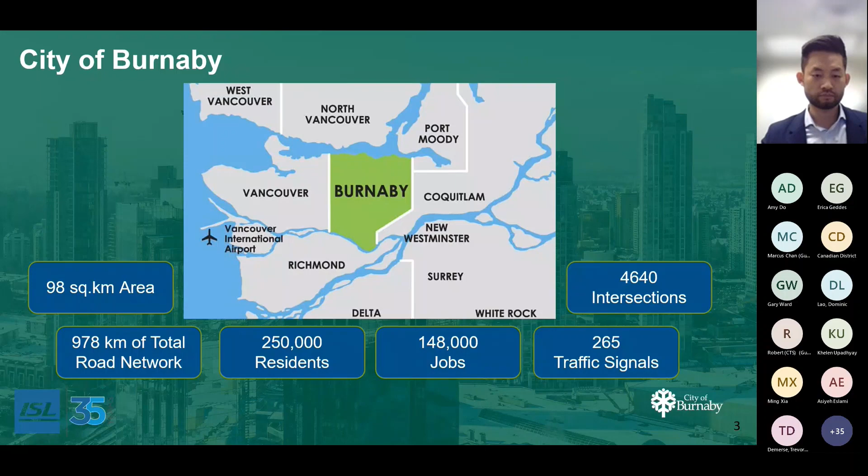So why did we venture into doing this study itself? The road safety network screening was really a result of the Connecting Burnaby Transportation Plan. It was adopted by council in December of 2021, and this document guides transportation planning policy and decision making for the next 30 years. In this plan, there are 6 main goals.

The first one here is to provide all people access to the transportation system, to enable safe and secure movement of all people, goods, and services across all different transportation modes, to support the health and well-being of the community by encouraging, enabling, and empowering people to choose sustainable or active modes of transportation. Also to help direct transportation planning and infrastructure towards green, sustainable modes, and to support Burnaby's economic, environmental, and social prosperity, along with the development of a connected community for both physical and social connections.

So we also have 3 main targets here. The first one here is Vision Zero.

This goal is to achieve 100% reduction in deaths or serious injuries on Burnaby's transportation network. So in the following sequences, by 2030 we would like to achieve a 20% reduction. By 2040, 75% reduction. By 2050, 100% reduction.

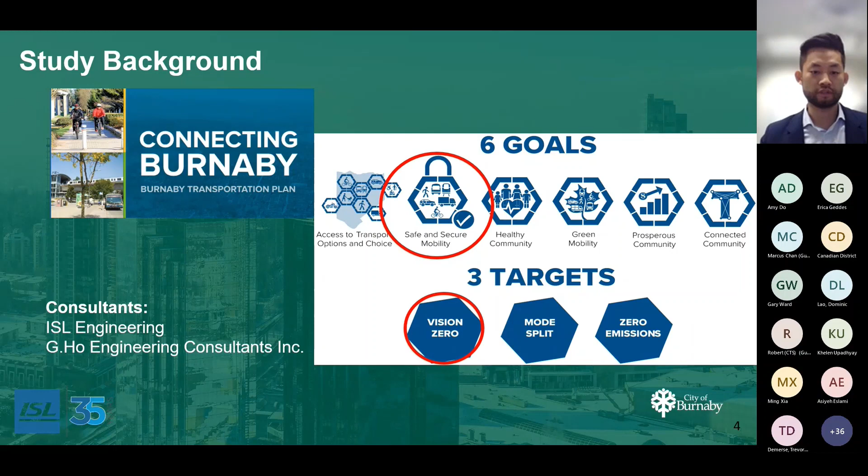So just a brief overview of our study objectives. Road safety network screening is one of the most effective methods in identifying and prioritizing where road safety improvement investments should be directed. Fundamentally, our main goal of the road network screening is to improve the overall safety of our intersections.

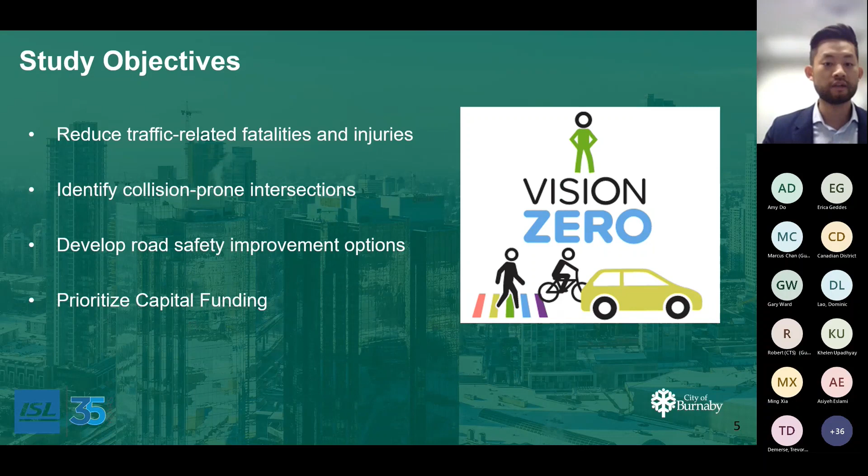We want to identify those collision-prone intersections and analyze them to evaluate potential safety improvements. Then we want to develop short, medium, and long-term road safety improvement investments that can be allocated to achieve the greatest safety benefits. Lastly, the study will help the city prioritize its capital funding plan for the next 5 years.

So I just wanted to go over the approach of the road network safety screening. The first step is to conduct a large gathering of data and also conducting initial analysis. After we do this initial analysis, we go into actual selection of the collision-prone intersections by ranking those intersections based on key safety performance indicators.

Then when we identify those locations, we conduct various analysis on collision data and also conduct more site visits to understand the safety issues.

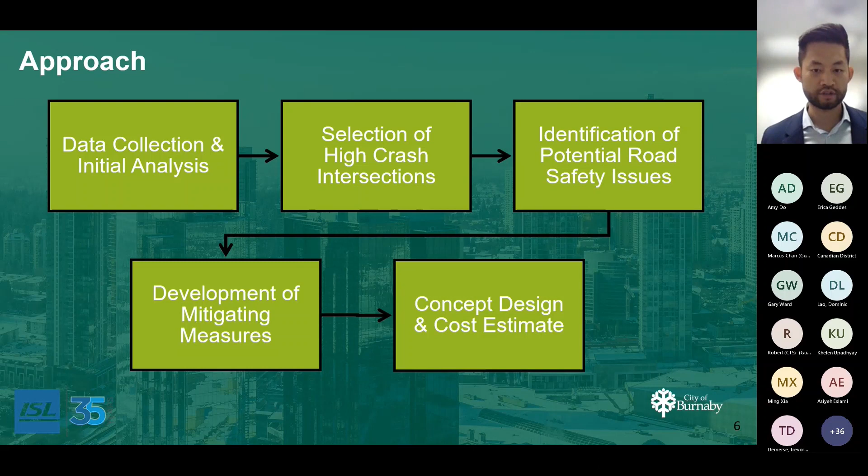And then from those safety issues, we identify countermeasures and mitigation measures to see how we can improve these intersections. And from there, we could take it to a concept design and estimated costs, which helps determine our capital funding needs.

So in our initial data collection, just to give you some context of the numbers we're dealing with, ISL and their team looked at ICBC data between 2016 and 2020. In the span of 5 years, there was 88,000 ICBC claims. It was narrowed down to 59,000 intersection and mid-block collisions. And of those 59,000, 40,000 were property damage only. So it leaves us with approximately 19,000 injury and fatal collisions.

In this case, I want to highlight the term casualty collisions. Casualty collisions are the ones that involve injuries or fatalities. Within those casualty collisions, we had 35 fatalities and 849 VRU injuries. Another term here is VRU, which stands for Vulnerable Road User Injuries, meaning anything involving pedestrians, cyclists, seniors, and children. So 2 terms to really take note of here are casualty collisions and VRU.

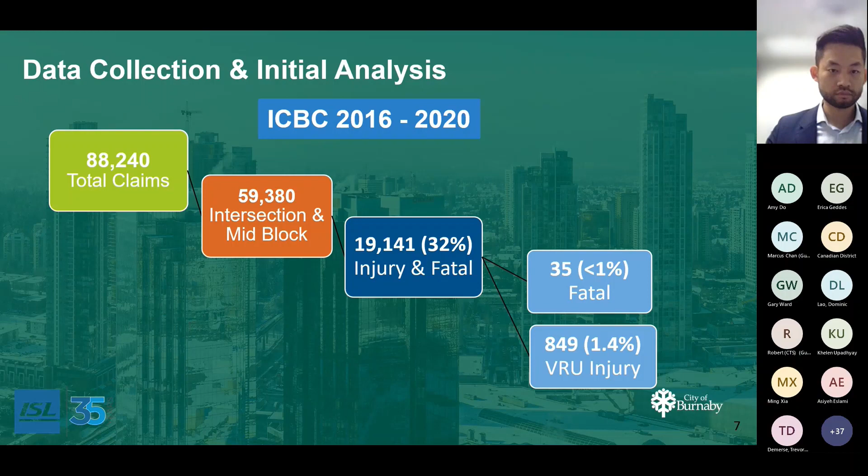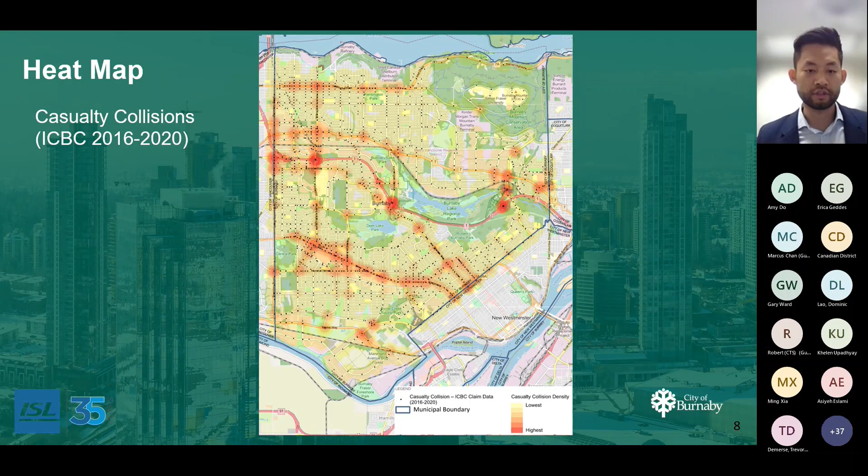So how do we go about ranking the collision-prone intersections? There are 4 safety performance indicators that we look at. The first one, the most important, is the annual casualty collision frequency — the number of casualty collisions occurring per year at those locations.

The other 3 indicators are: fatal collision occurrence, meaning any fatalities that occur; casualty percentage, which is the number of casualty collisions over the total number of collisions; and lastly, the total number of vulnerable road user collisions involving pedestrians and cyclists. Using all 4 of these safety performance indicators, we're able to rank the various intersections into our list.

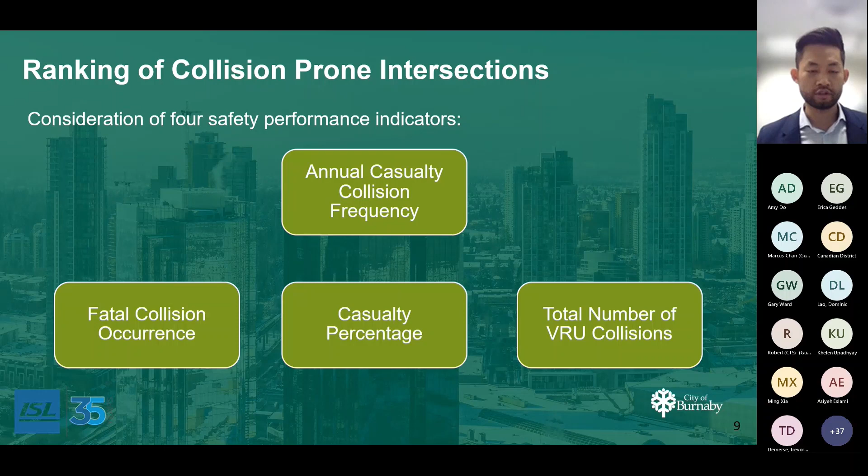So after we rank the intersections based on those 4 safety performance indicators, we get a full list of intersections. We decided to remove intersections that shared a boundary with other municipalities or are under the Ministry of Transportation jurisdiction. Of course, we want to partner and align with neighboring municipalities and the province for these improvements, but for the interests of the city's capital planning program, it was important to focus strictly on intersections under full Burnaby jurisdiction.

So it was determined that, in order to streamline the design and implementation of this process, the intersections would be grouped based on corridor-wide improvements, as opposed to individual locations all throughout the city. This resulted in 5 groups along various corridors, with each group having a total of 9 to 11 intersections. In total, we had a very ambitious plan of reviewing the top 50 intersections throughout the city.

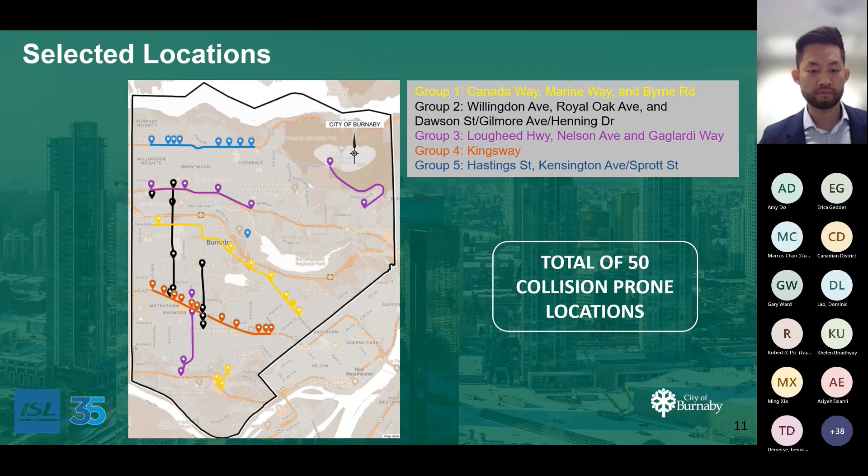So what we say from James is the approach we are going to take to identify some of the locations, and then we identify the 5 groups of corridors and also 50 locations.

So what we're going to do is a road safety review for every intersection in this area. We will do an existing condition review, including land use, road geometry, and other factors. Then we have the detailed collision analysis, which is something like temporal collisions - by day, by time, by year, or something like that. And the collision type could be VRU or turning movements, and contributing factors.

And then we're using this information to do a collision diagram for all 50 locations. Then we will have the field review, where at least 3 road safety engineers visit all the sites and identify what issues exist, and also identify some possible improvements for the future.

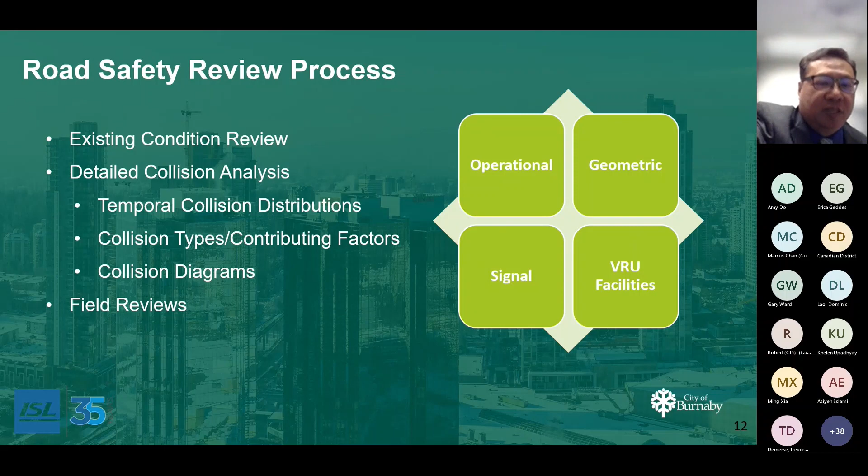Okay, we say that we're going to develop this for 50 locations. I'm not going to talk about all 50 locations in this presentation - we'd probably be talking until dinner time. So why don't we just go through one case study? That's Canada Way and Burris Street. And Canada Way, as I said before, is group one, so that's one of the intersections we did first.

So for each intersection we also prepare something called the existing lane configuration, including how many lanes, using the latest Burnaby map, and also showing what it looks like.

We also note major changes since 2016, because our collision data is from 2016 to 2020. If there's any geometrical change or even signal operation change since 2016, it may affect the collision pattern or affect our result in identifying the issue or improvement.

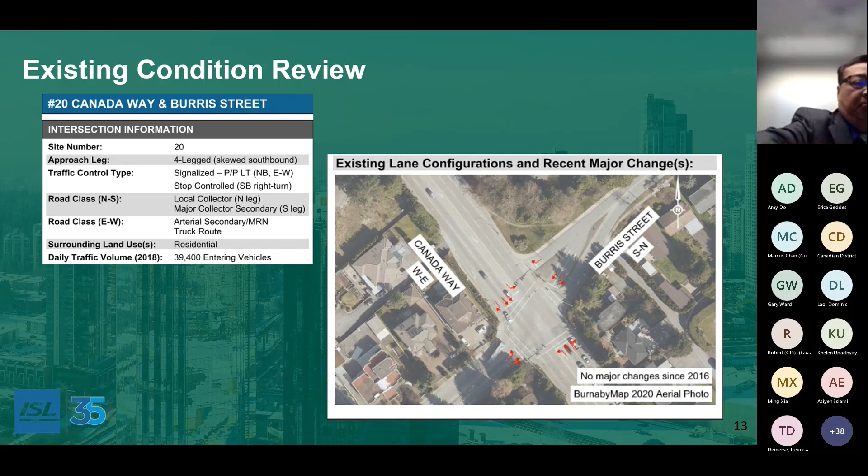Then we also do a detailed collision analysis. For every intersection we have something like this, showing detail for the collision data and identifying some information. You can see the distribution - we have a chart showing the yearly annual number of collisions.

We want to specify this because I think Kim mentioned that the number of collisions is large if you look at everyone. For this level screening study, we focus on casualty collisions - I think this is more representative of what the issue looks like at that particular location.

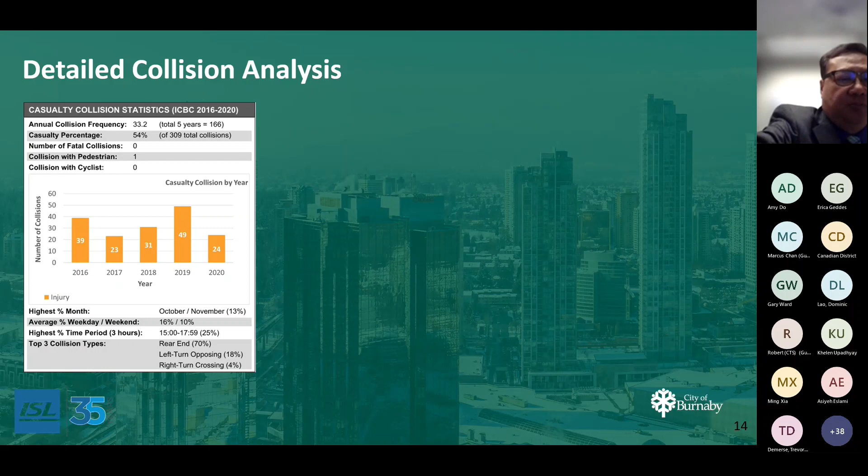Also, the distribution shows the annual numbers, the day of week, and also the time. We use ICBC time categories, so you can see 3 hours for each time period, and also the collision type.

We're also using the different collision types based on the ICBC data. For the rear end and left turn, this is a signal intersection for Canada Way and Burris, so you'd expect the rear end to usually be the highest one. But left turn opposing is still around 20%, so we know that may be an issue. And then right turn crossing at 4%, so that may be something we need to improve.

We also based this on the ICBC data, and we'll review all the key incident data so we can identify what the contributing factors are. Following too closely is usually the case, failing to yield or stop is probably the right-hand one, and then road surface.

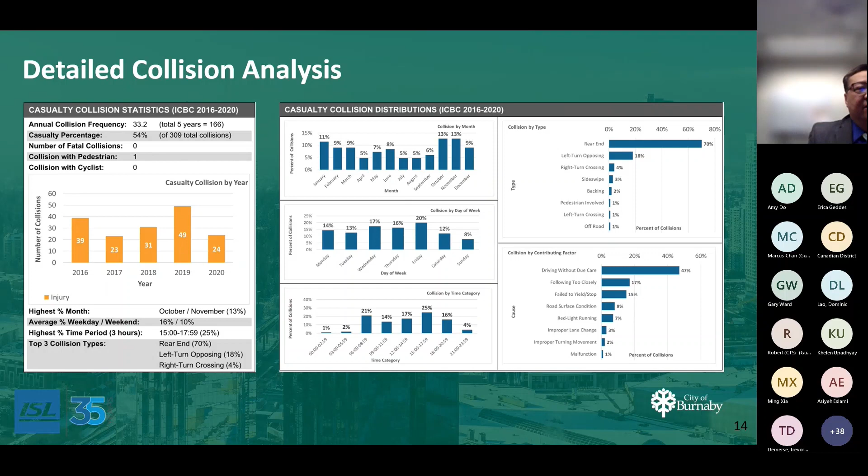Then we're doing the collision diagram. As I said, the collision data is quite significant, a large amount, so we decided to focus on the most recent 3 years, using 2018 to 2020.

Even so, at this intersection we found 100 collisions to look at, and we could identify 82 of them. The 18 we can't identify are mainly due to insufficient information - unknown location or direction.

The collision diagram looks like this. You can see the majority of collisions are probably in the lot - we can say east-westbound rear end. You can see quite a few here, and also some left turn opposing for the east-west left turn.

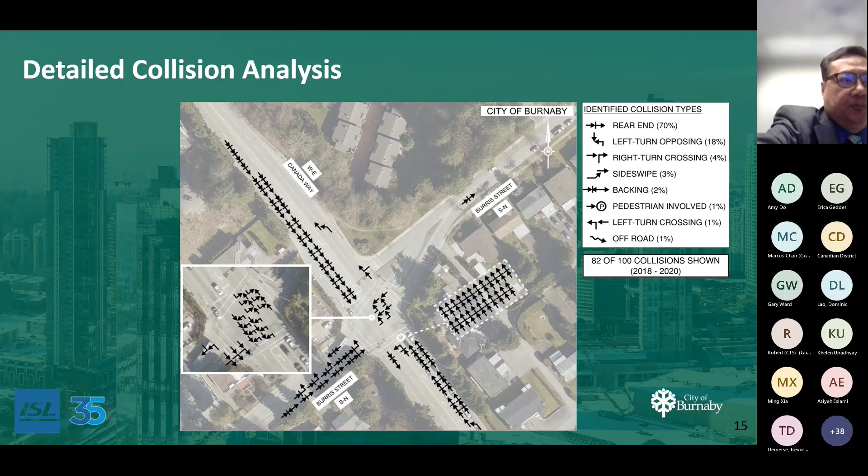Then we're doing the field review. We take tons of photos for the field review because they can be used for that, and then we stay there for a while and see what the configuration is.

You can see there's possibly two configurations here - the car turning, the truck turning at the yellow time, and people maybe speeding up. You can see the slope from various directions and from Canada Way. Also, this is making cars faster, and there's also the right turn here. You can see here what's expected.

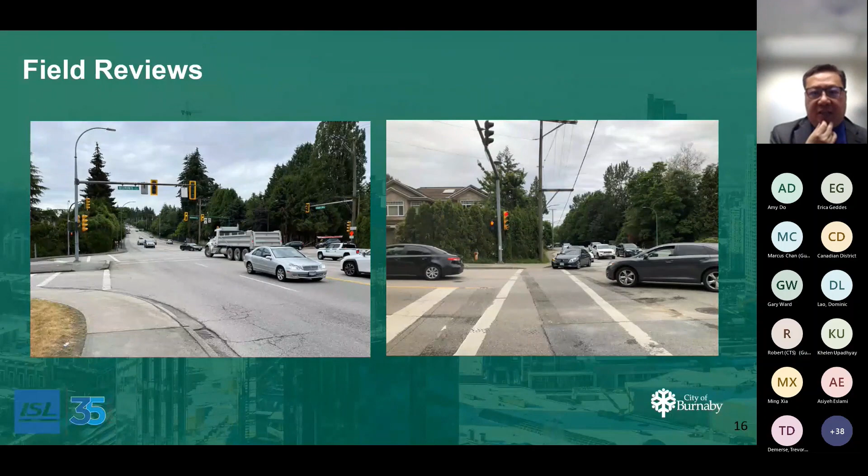As I said, we will drive through and walk through this area, taking photos for the experienced safety reviewer. Here we only show the vehicle, but actually we don't only look at the vehicle - we also need to look at pedestrians, bicycles, all the VRUs. All our site visit samples are based on the TAC road safety manual.

Then we're identifying some potential road safety issues for that intersection. Summarized, as I said before - the rear end, and also the left turn and right turn crossing, skewed approach, and also some limited signal head visibility, and also the pedestrian facility may not be sufficient.

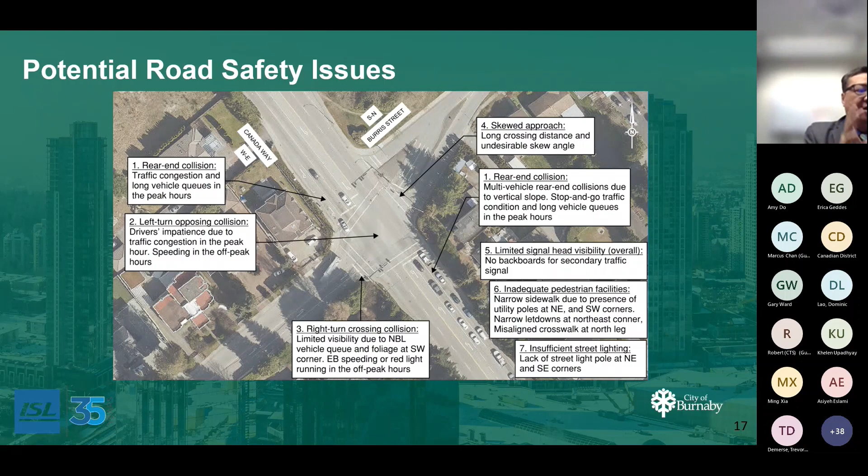And also some street lighting - when we went at nighttime we found that's an issue. Anyway, we summarize everything and move on to the next step, which is developing the mitigation measures.

Before developing the mitigation measures, we have some ideas of what we're going to do. We need to make sure the improvement is achievable and cost effective. You could build an overpass or something like that, but it may not be achievable or cost effective, so we will screen that out - or maybe not screen out, but put it in reserve or something like that.

The main point is reducing casualties for this collision, so it depends on the number of collisions and the particular movement we try to address. Also, because of the land, we can't do quite significant widening or moving the type, or building something on some of that land. Sometimes we can't do it, sometimes we can, but that depends on land availability. We will talk to the city and make sure we've got enough land to do it.

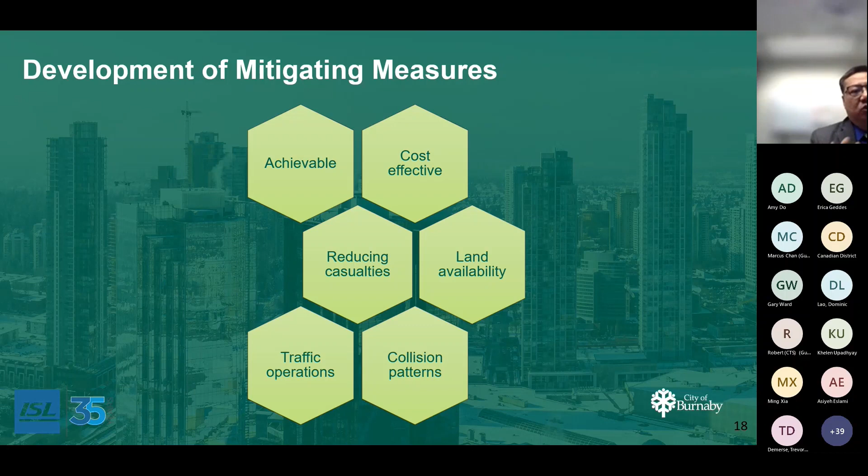For traffic operation, we do need to do the Excel analysis, but we base it on traffic volume - what traffic volume is moving, and what's the best way to improve it. So we say that's the before condition. Based on this, we actually do some short term, medium term, and long term plans. This is some example.

Some examples of the improvements we're going to do. For example, at the rear end, targeting the issue, we will do optimized signal progression, anti-skid pavement, or other measures. For left turns, we're adding yellow backboards and making protected-only phases. For right turn crossing, we're doing site-specific or location-specific improvements. And for skew, we also do something there.

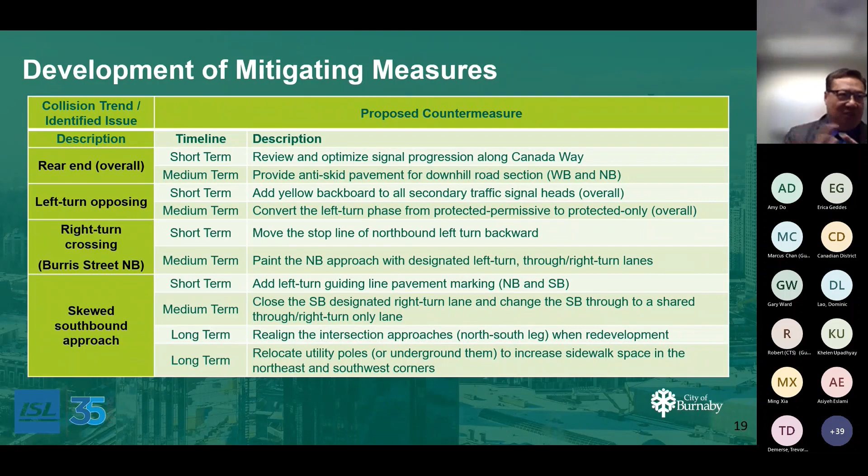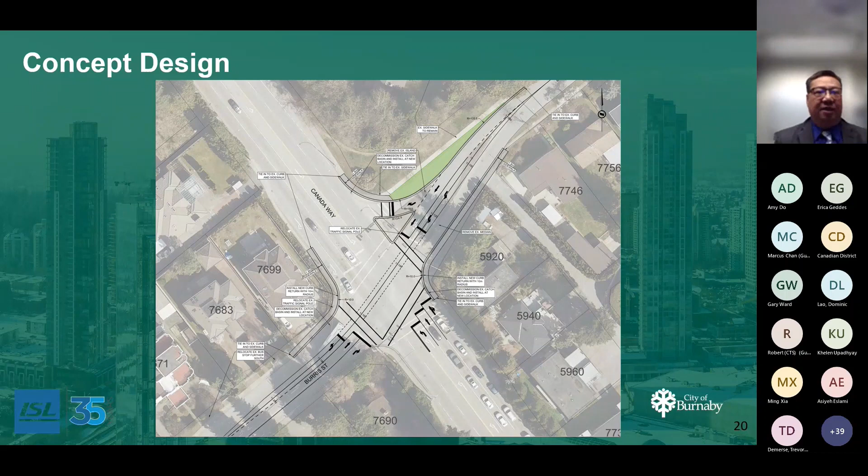Based on this conceptual design, we also provide some cost estimates based on the latest cost data from the city and the region. Okay, that's what we've got — now for the next steps.

Before I hand it to the team to talk about next steps, I want to briefly talk about our takeaways. Number one, I think the takeaway is early engagement — it's good to engage early with the city, because in the public sector we need to know what's happening and what exactly they need. That moves to the next point.

Customized decision criteria to fit the city's goals. I know in this city they want 50 locations or corridors prioritized for future funding. But a different city may have a different idea — maybe Vision Zero, or a focus on bicycles or pedestrians. So we need to identify what's happening there.

I didn't show this in the presentation, but we do have something called a decision tree — a step-by-step process for what to do. That's very detailed. And then we do data collection.

We did a lot of data collection here — about 88,000 collision data points, and some of it is very good. We fortunately got ICBC to give us all the data, but we still need to screen it. We also need to go through past police data, and emergency vehicle data — not from this study, but for other studies, we need to think about what's better.

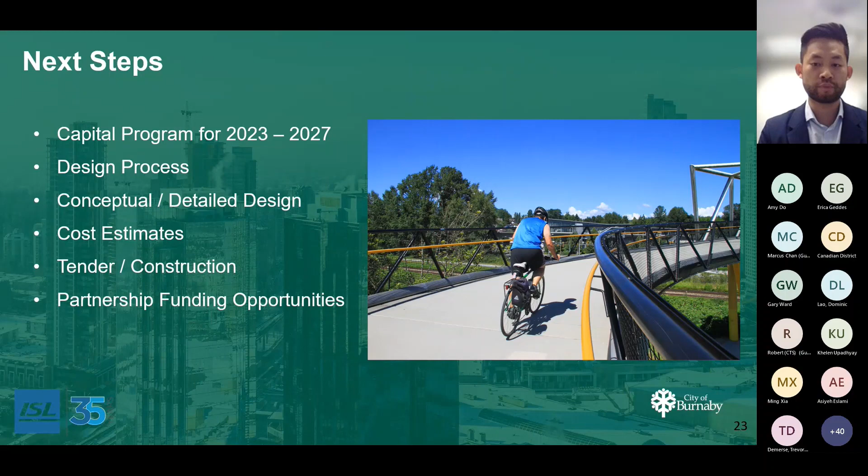Then we'll be providing detailed designs for the various concepts, and coming up with cost estimates for the scale of the improvements being proposed. That will bring us to our tendering process and construction. At the end of the day, we're also very excited to work together with other partners and stakeholders to collaborate and improve the safety of our overall road network.